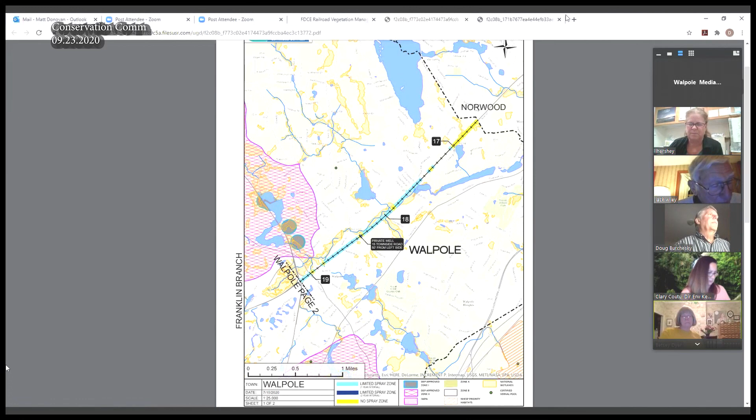Hearing anyone from the audience? Okay, someone make a motion to close the hearing? I'll move that. We have a second. All in favor? Bailey? Aye. Doug? Aye. Medio? Aye. Betsy? Aye. Jack? Aye. Okay, hearing's closed.

So Landis, what are we giving, a -3 and a -5? Is that the recommendation? Yes, that's what's been requested. Okay, then someone make a motion for a -3 and a -5.

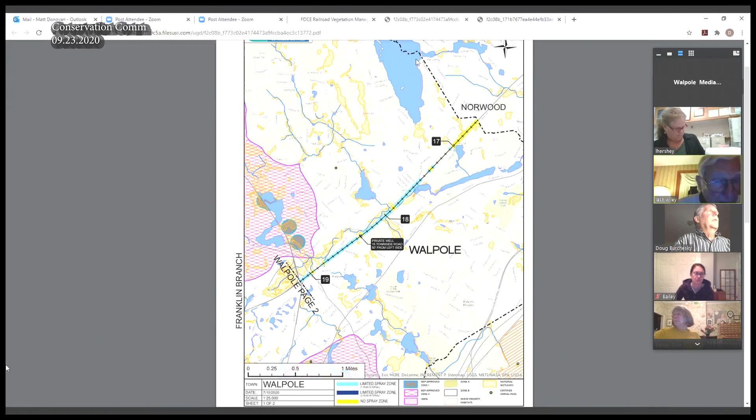I'll move it. Second that. Was that a Medio? Yes. Okay, all in favor? Bailey? Aye. Doug? Aye. Medio? Aye. Betsy? Aye. Jack? Aye. Okay, so we're all set on that.

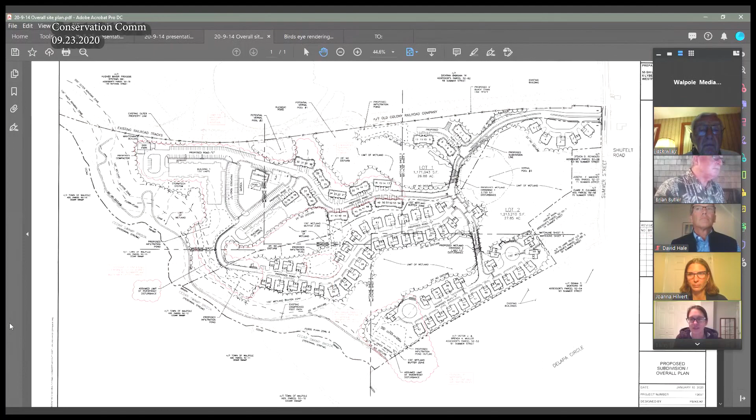If we move to the northeast here, Leslie—can everyone see that cursor moving around? Would it be possible to zoom in just a tiny bit? Great, thank you. That red cloud between units 17 and 16 here, as indicated on road D, two units have been removed there as well to accommodate stormwater displaced from other areas.

If we go toward the railroad tracks, Leslie, all the way—keep going. These are changes relative to wetland resource areas. There's significant changes in the layout of the project, and Patrick may weigh in afterward to fill in the details. Previously, where Leslie's pointing now, we have vernal pools 1 and 2, 1 to everyone's left and 2 to the right. The one on the left is wetland E in our scheme, an isolated vegetated wetland. To the right is vernal pool 2, or wetland A under our delineation scheme.

In between that, formerly we had residential housing in there, and we've retracted that to maintain the connectivity between pools 2 and 3, which will actually be confluent with 1 and 2, with pool 3 all the way over to the south there. Because that wetland will be kept intact, there'll be a passage beneath there, maintaining connectivity.

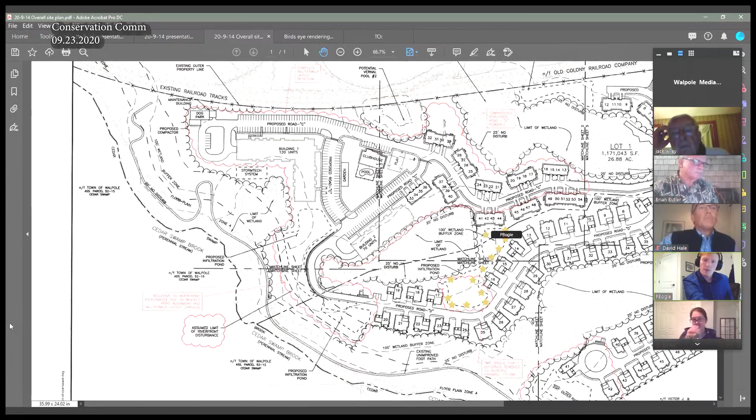Additionally, back to Brian's point here, we had this area, which increased the stormwater in here. We were also able to shift some of the stormwater away from these houses and maintain at least 20 feet, where before we were a little closer. And in the area down here, Leslie, if you can kind of shift that just back down a little bit.

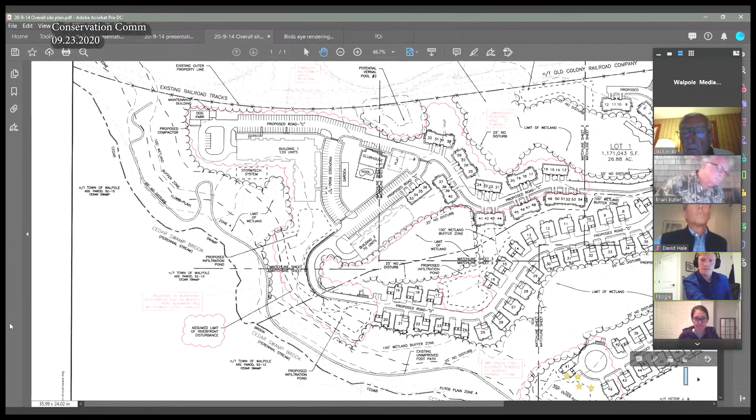Patrick, can you hear me? Yes, I can. That basin you were just touching upon, what number is that? One of the problems I was having is your basins are not numbered on this overall plan, so when I was looking at the details, it was taking too much eye strain to figure out which one was which.

I apologize. On the full 5-1 plan set, every basin is labeled. So I'll go in order right now. From the top, the northeastern section here, this is basin 1. In the center, you have basin 2. Over here, you have basin 3. This is revised basin 4. And then this is basin 5.

Okay, thanks. And only basin 1 hasn't been revised here. Basins 3, 4 and 5 were shifted out of the riverfront, whereas basin 2 was mainly just to add additional area to reduce some of the impacts on some of the surrounding buildings. We also might be able to shift some of the grading to pull some additional water from where the infiltration pond was receiving some of that runoff water too.

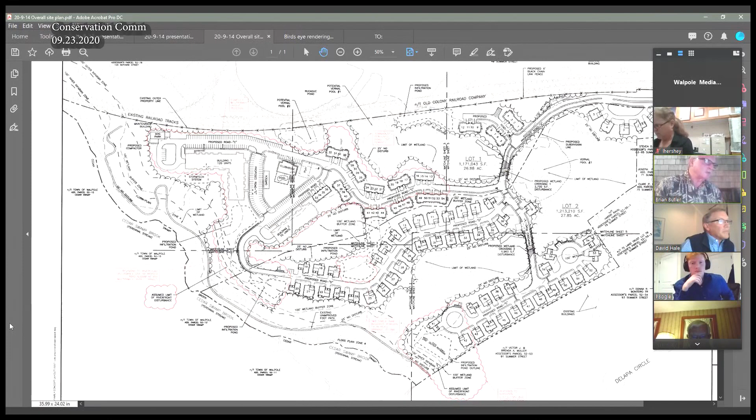And just David, one more footnote here with regard to the change of the amended layout: we currently have impacts exclusive to stormwater in the outer riparian zone, the 100 to 200 foot zone, and the totality of it in the worst case scenario, which is likely to be reduced slightly on final design, is 8.8% impact, which is below the 10% threshold specified in the act. Although the value of the impacts attributable to stormwater or on-site sewage disposal or a few other items is not tabulated in the impact assessment for the Riverfront area. But regardless of how you split it or view it, we're now below the 10% threshold, so at least 91.2% of the Riverfront area will remain intact at the conclusion of this.

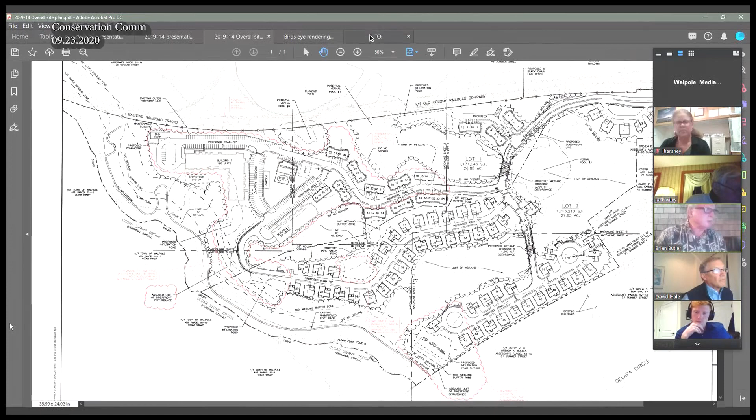Okay, anything else? We can go through the responses, kind of paraphrase our responses. I guess maintaining this up I think is adequate. We may want to put up the beta letter with our annotations on it - Leslie, if you could have that on board as a backup. But I've got enough notes here, I think, from Marty's discussion earlier, so I think we can at least jump through these, and then Patrick could continue.

I could probably start with the stormwater, since there's only two I need to address.

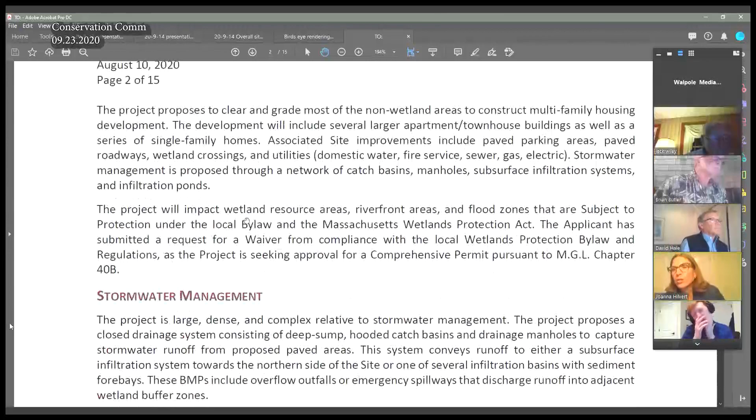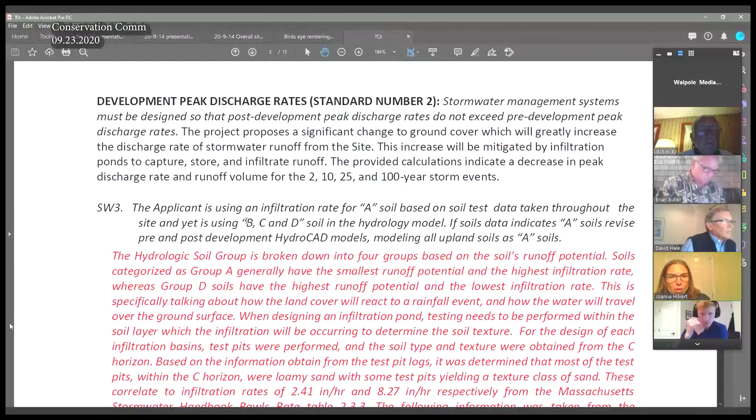Yeah, go ahead, Patrick. But before that, two quick overriding points: first, because this is a 40B project and we've requested a waiver of the bylaw, that will be addressed by the ZBA. So questions and comments specific to the bylaw are non-scope for the peer review, as they are not within the jurisdiction of the board for this hearing process.

Second point is on the stormwater issues. The peer review hired by the ZBA was Tetra Tech, to review stormwater issues, which we discussed at the beginning of this peer review process, that we'd try to avoid overlap between the two peer reviewers, and that the commission would rely on the Tetra Tech review of stormwater issues.

Just to add on to that, we did include a review of what Tetra Tech had in their letter. And if there's additional review that the commission needs to do, they will, because stormwater management standards are part of the Wetlands Protection Act, part of their jurisdiction. So it's not completely taken out of their jurisdiction here.

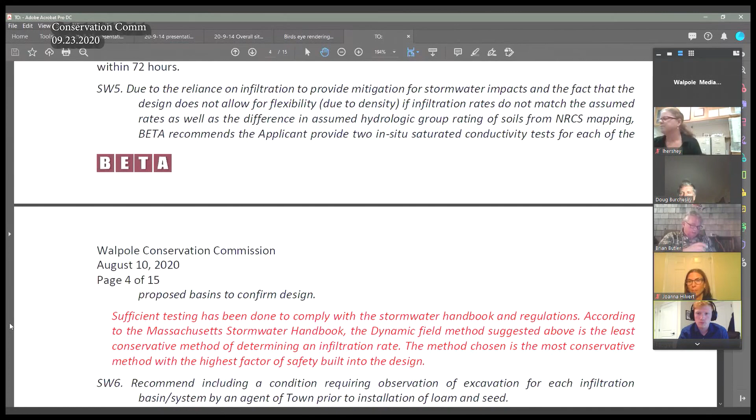So I believe those are the two items I had to address. We can take it from there unless there's questions, Mr. Chairman, or I'll keep going. Okay.

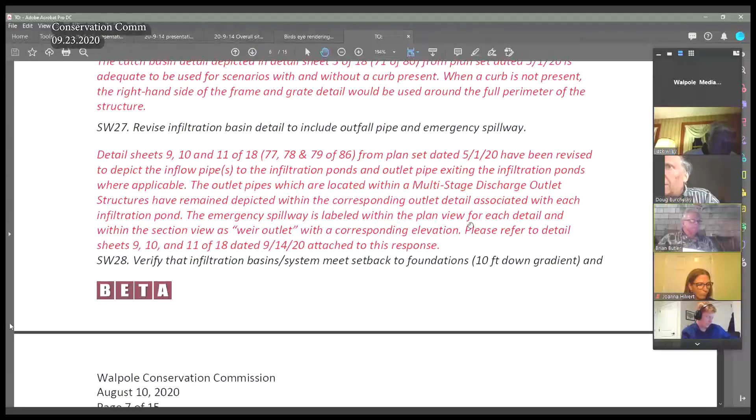WE2, with regard to buffer zones between vernal pools or among the vernal pools.

There'll be migration corridors between the three pools by way of removing the residential building that Patrick mentioned by the railroad tracks. We've pulled out of this, so there's no development between Vernal Pool 1 and 2 along the railroad tracks. To Vernal Pool 3, there's a large contiguous area that's largely wetland, with a 5-foot by 14-foot box culvert connecting the two.

So there will be patency between the three pools without any interruption in a linear manner. There is going to be terrestrial impacts—there always is within 1,000 feet of a vernal pool. You're having impacts, but we've made measures where the continuity will be retained between the three basins there. For WE3,

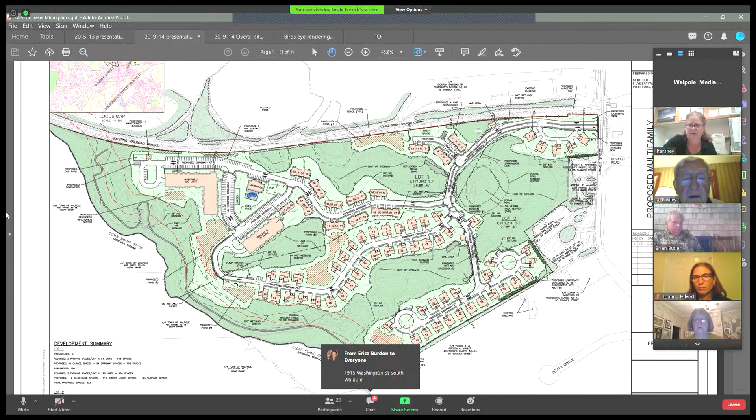Is that Erica, was it? Okay, so this particular abutter knows how to unmute themselves, but they are not prepared to speak tonight. Okay, does everybody see the screen? They're going to email Leslie, I guess, with some questions or comments. Okay, right, yeah. So they can just unmute themselves if they want to speak. Okay, or let me know in the chat. Yeah, is there anyone else?

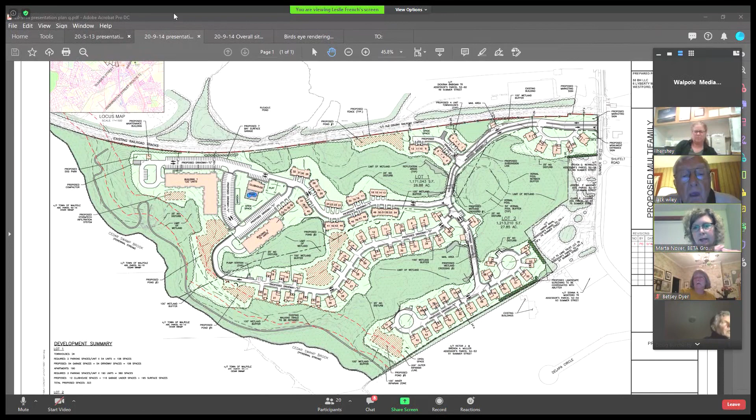I think it would certainly be beneficial to have Marta with the commission. So it's a question of, do you need to do anything on your own first, or would it be beneficial if the commission was along while you did your observation? I could do this concurrently with the commission - we'd look at that area, and at the same time I would look at the other areas that I would want to look at. So it would just be one trip.

Okay, so I think basically then the commission should be with you - is that what you're saying? It's completely up to the commission. I can go out there and collect the data and the information, take photographs, and describe it to the commission at the meeting, if that's easier for you. I just thought maybe if you wanted to go out and look yourself, I could go out there with you. It's really up to you.

I feel strongly that if we actually do make another date to go out there, we really do find out whether it's a date that's compatible for everybody. Either everyone should see it, or Marta, you can come and report back, because 3 of us have already been all over the site. So what's the day? We don't have a date yet, but once we have it, we've got to actually have quite a few people be okay with that date. I think that's the challenge.

I think it is more beneficial, in this situation, for us to be in the field, preferably with Marta. Now, is that in your scope at this point, that you can go out yourself and then come back with a commission?